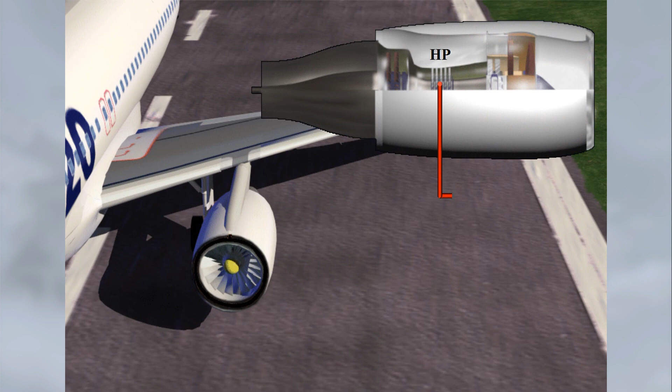Each engine air intake is anti-iced by an independent air bleed from the high-pressure compressor. The air is supplied through the engine anti-ice valve. Note, in the event of an electrical power supply failure, this valve will automatically open.

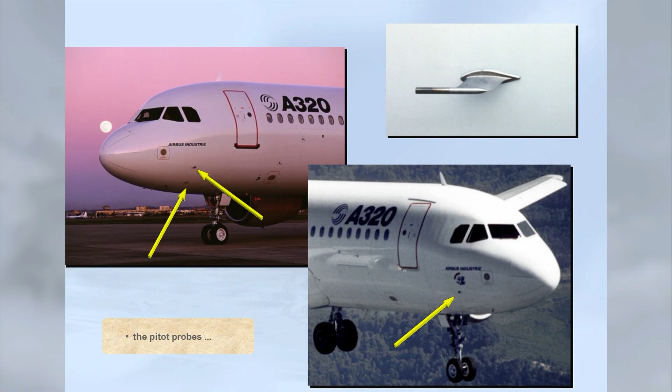Electrical heating is provided for windshield anti-icing and cockpit side window defogging, the angle of attack AOA probes, the total air temperature TAT probes, the pitot probes, and the static ports.

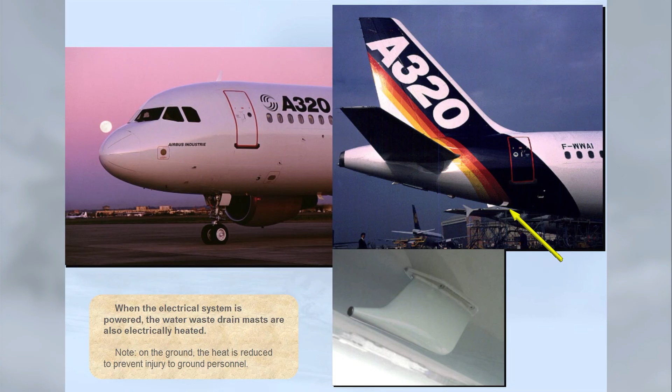When the electrical system is powered, the water waste drain masts are also electrically heated. Note, on the ground, the heat is reduced to prevent injury to ground personnel. The ice detection system, if installed, consists of 2 separate ice detectors located on the forward lower section of the fuselage. An external visual ice indicator with an integrated light is installed between the 2 windshields.

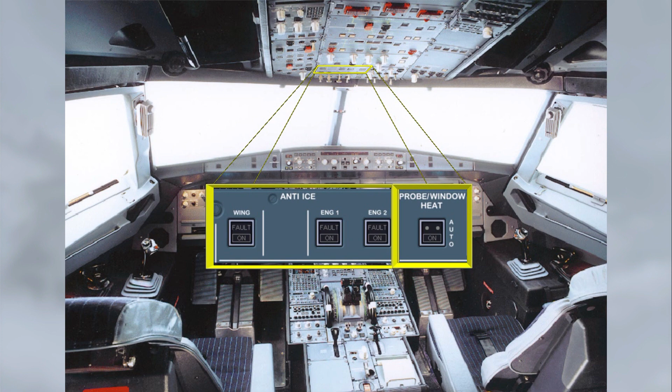All the ice and rain protection controls are located on the overhead panel. The crew manages wing and engine anti-ice valves through the anti-ice control panel, all the electrical heating system by the probe window heat push-button switch. Memos associated with anti-ice operation are presented on the engine warning display memo area.

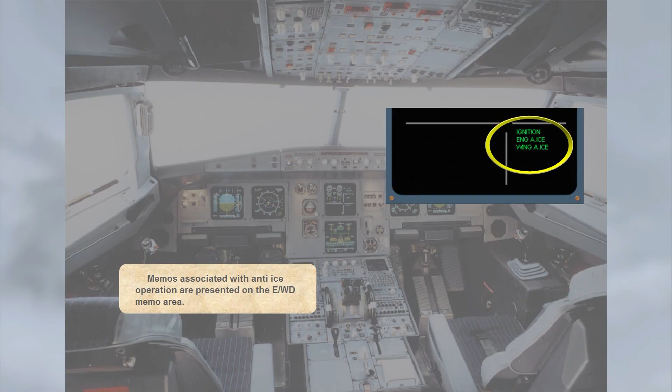To improve visibility in rainy conditions, the flight crew can spray a rain repellent liquid. Separate push buttons control the application of the rain repellent on each side of the windshield. Electric wipers are provided for the windshields. They are operated at slow or fast speed through the wiper selector located on the wiper panels. The maximum speed with the wipers in use is 230 knots.

During the walk-around, you will verify the condition of all the pitot, AOA and TAT probes. You will also check that all the static ports are clear and the covers are removed. In cold weather conditions, there are additional procedures for exterior inspection and ground de-icing, anti-icing.

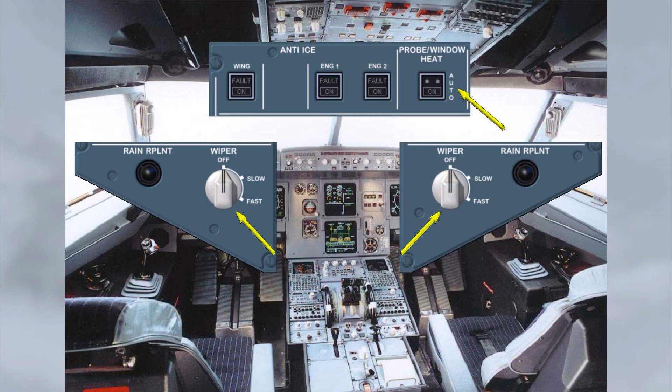As part of the cockpit preparation phase, you should check that the wipers are off and the probe window heat push-button switch is set to auto. Note, when in the auto position, the probes and windows are heated automatically after starting the first engine. Today, your takeoff is in icing conditions, so let's see what you have to know.

Potential icing conditions are defined as outside air temperature below 10 degrees Celsius, visible moisture in the air. Note, as with any anti-ice system, you should turn the system on without waiting for a visible ice buildup.

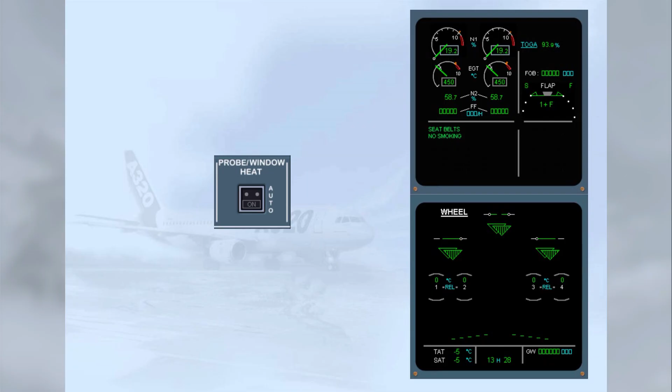The engines are running. The automatic function of the probe window heat system means that on the ground, the probes, TAT excepted, and the cockpit side windows are heated. The windshield heating operates at low power. Note, you can also defog, de-ice the windows manually prior to engine start by pushing the probe window heat push-button switch to the on position.

Because you are in potential icing conditions, the engine anti-ice system must be selected on. Select the Engine 1 anti-ice. Notice that the amber fault light in the Engine 1 anti-ice push-button switch illuminates momentarily during the valve transit.

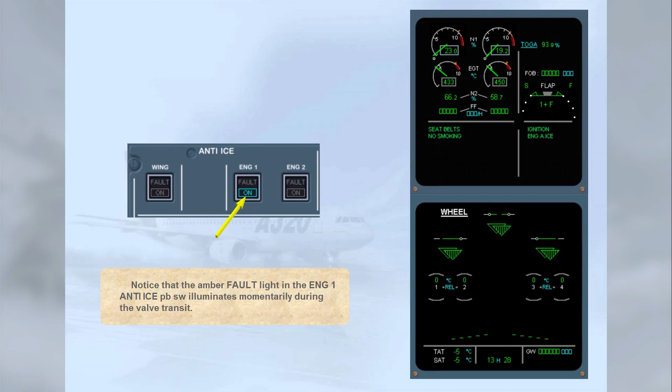As soon as one engine anti-ice push-button switch is set to on, the engine anti-ice memo appears in green on the engine warning display. The ignition memo appears in green, indicating that continuous ignition is automatically selected for the engines. The idle N1 is automatically increased to give better protection against flameout. N1 limit, amber tick, is automatically reduced because air from the engines is taken for anti-icing.

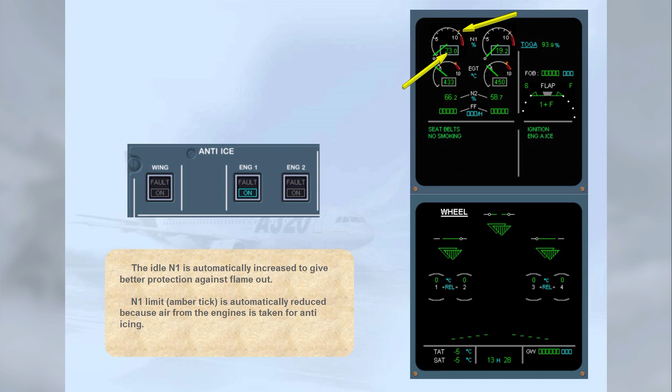Continue by selecting the Engine 2 anti-ice. Both engine air intakes are now being anti-iced. Note, the fan blades are not anti-iced. If significant engine vibration occurs due to ice accumulation on the blades, the engine should be accelerated to 70% N1 minimum for approximately 15 seconds prior to higher thrust operation.

As an added precaution, we will use wing anti-icing. The wing anti-ice push-button switch controls the wing anti-ice system on both wings simultaneously. Note, use of APU bleed for wing anti-icing is not permitted. Notice that the blue light comes on, the fault light in the wing anti-ice push-button switch illuminates amber momentarily during the valve transit, the wing anti-ice memo appears on the engine warning display, and the idle N1 is automatically increased.

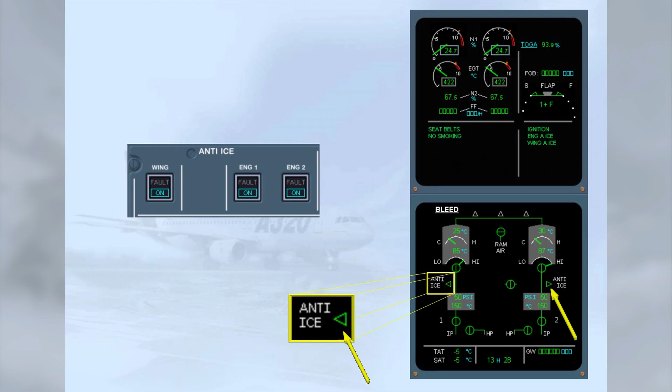We have called the ECAM bleed page for you. Observe that the anti-ice white indications are displayed, meaning that the wing anti-ice push-button switch has been set to on, and the green triangles are displayed, indicating that the wing anti-ice valves are open.

Observe that 30 seconds after the wing anti-ice push-button switch has been set to on, the wing anti-ice valve indications disappear. This is because the wing anti-ice valves close automatically to prevent an overheat of the slats. This is the ground test sequence. At liftoff, the valves will reopen automatically and the slats will be heated again. Note, use caution when taxiing with engine anti-icing on, because ground idle is increased.

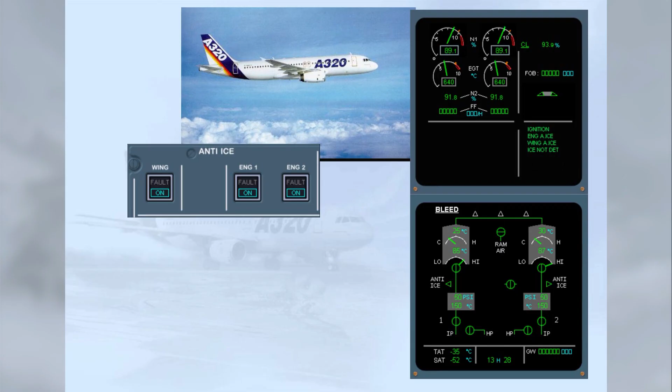You are now in cruise, clear of icing conditions. If you do not expect the conditions to change, anti-icing systems should be switched off. Note, if the ice detection system is installed, an ice not detected memo indicates that no ice has been detected for approximately 3 minutes or more.

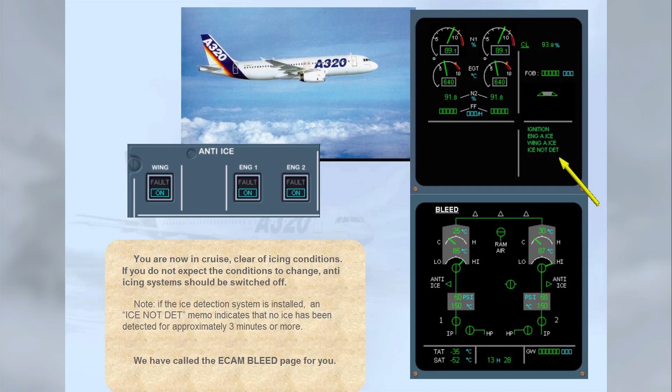We have called the ECAM bleed page for you. First, switch the wing anti-ice off. Observe all the wing anti-ice indications have disappeared on the ECAM bleed page. Continue by switching off the engine anti-ice systems. First, switch Engine 1 anti-ice off. Now switch Engine 2 anti-ice off. During climb or cruise, the anti-ice systems may also be switched off when the SAT is below -40 degrees Celsius, even if there is visible moisture.

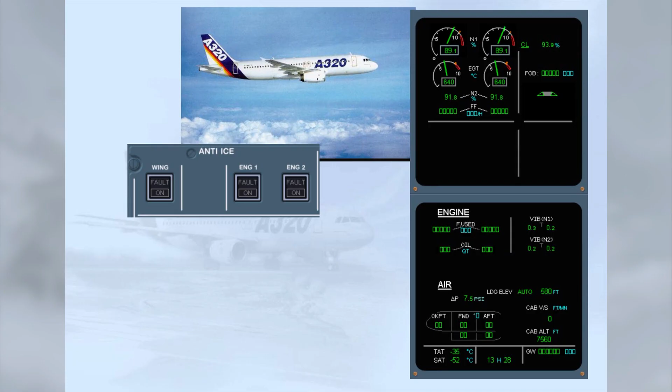We are about to commence the descent. Because potential icing conditions are expected, the engine anti-ice system is switched on prior to starting the descent, even if the SAT is below -40 degrees Celsius. We will switch the engine anti-ice on for you.

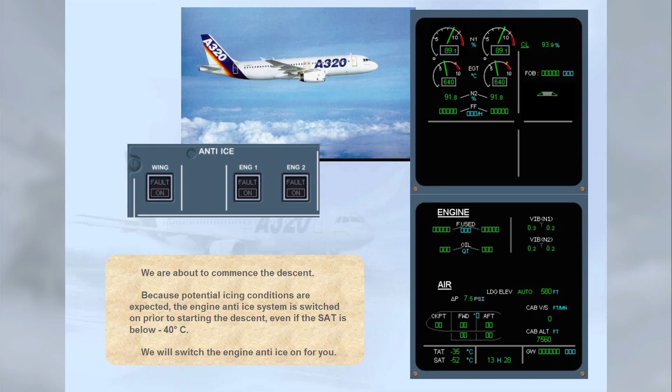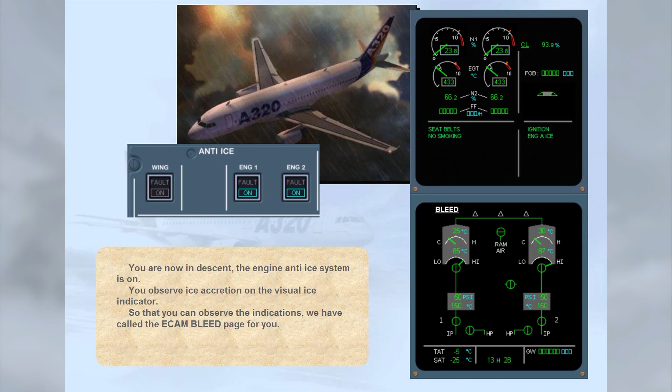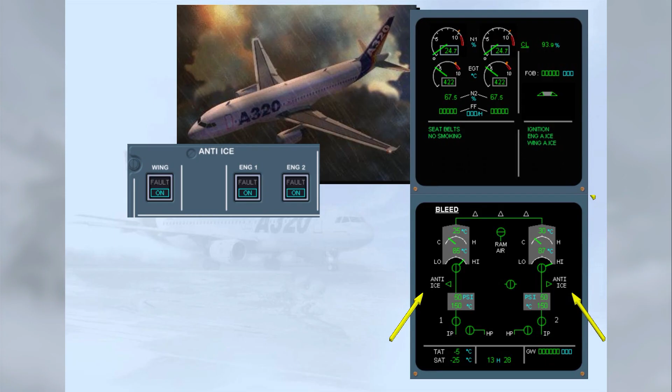You are now in descent. The engine anti-ice system is on. You observe ice accretion on the visual ice indicator. So that you can observe the indications, we have called the ECAM bleed page for you. Switch the wing anti-ice on. Observe that the wing anti-ice indications are displayed on the ECAM bleed page. The wing anti-ice memo appears on the engine warning display. Note, because the engine idle speed is increased when the anti-ice system is used, the descent path angle is reduced.

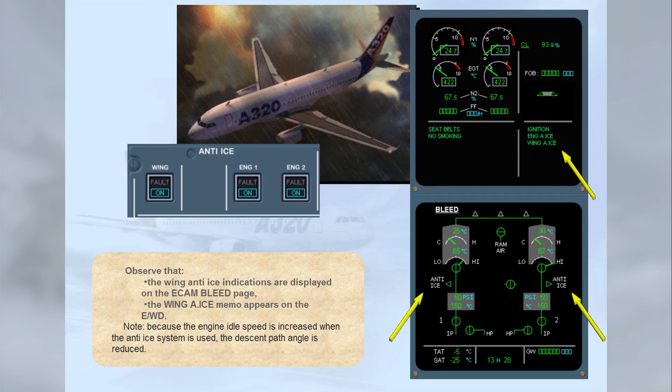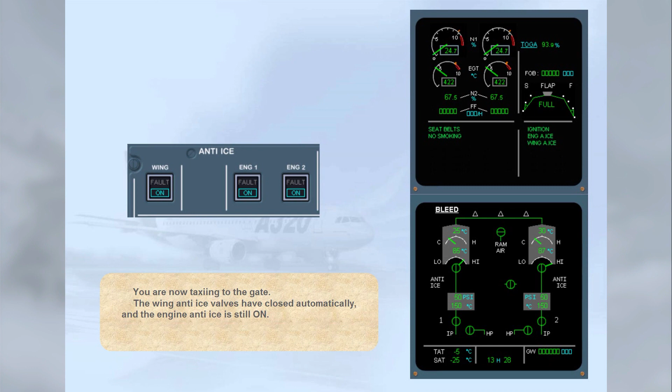You are now taxiing to the gate. The wing anti-ice valves have closed automatically, and the engine anti-ice is still on. Turn the wing anti-ice off. As the approach was made in icing conditions, do not retract the flaps and slats until after engine shutdown. Wait until they have been checked to ensure that they are clear of obstructing ice.

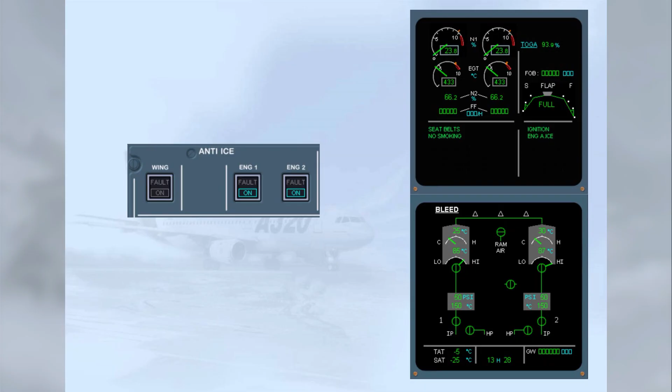Note: 1. During extended ground idle operation, periodic engine run-up, 45% recommended, may be performed to remove any ice from the fan blades. 2. For ground operations in heavy rain, refer to your FCOM.